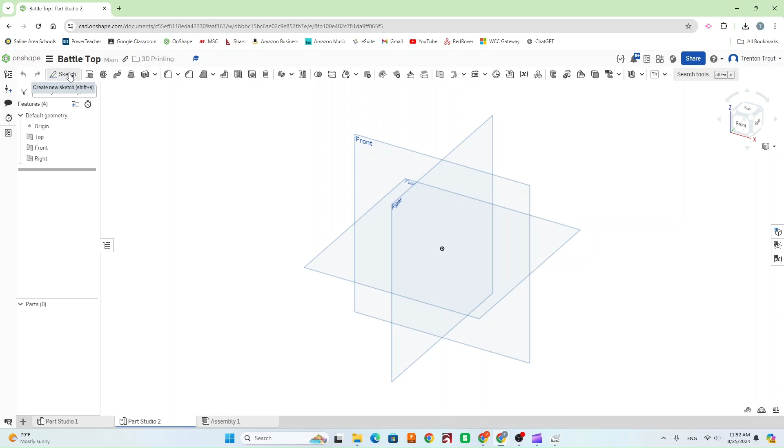The first thing we need to do when modeling this is create the attachment point so that we can spin the battle top up with the drill. That attachment point is going to be standard across all of your battle tops, and this is going to be that first step to modeling it.

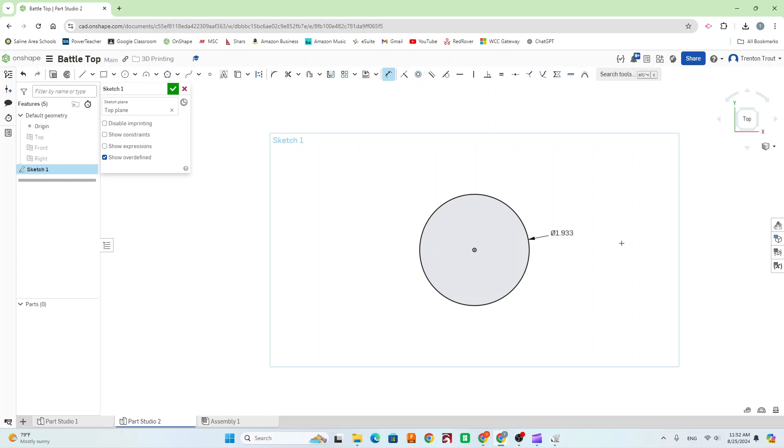First thing I'm going to do is create a circle. I'm going to dimension that circle to 0.75 inches, just like found on the blueprint, and finish that sketch. Now we're going to extrude that circle at a dimension of 0.5, also found on the blueprint, and hit the green check mark. So now we have a cylinder here that's extruded.

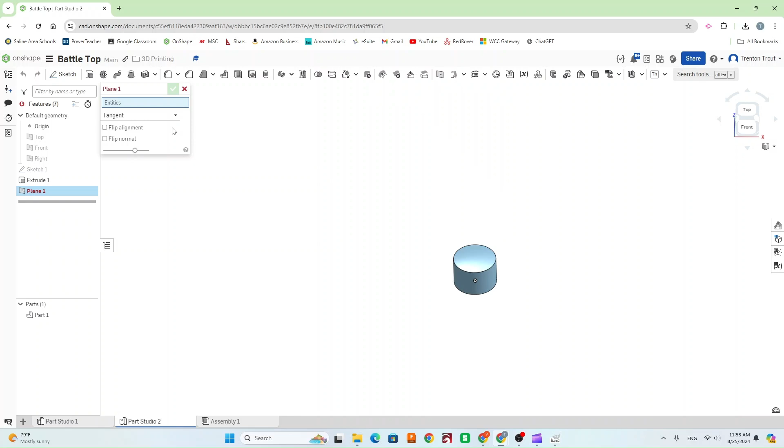So we're going to do something you probably haven't done before. We're going to do plane. We're going to make sure that we are on tangent plane, and then we're going to select on our cylinder. This is going to allow us to draw a shape on the side of the cylinder so that we can create those spurs for our attachment point. We're going to do a new sketch on that plane once we have it created.

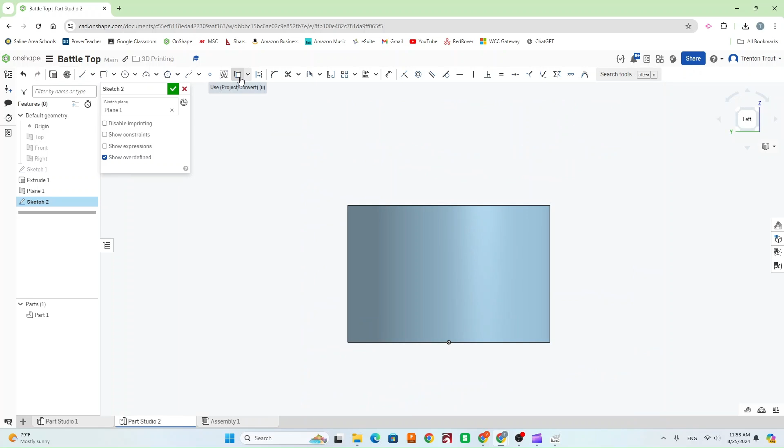I'm going to use the use/project tool and project our cylinder there. Then draw a line just diagonal across here. Now we can use our dimension tool, dimension from this top line to this point, and that's going to be 0.25 like found on the blueprint.

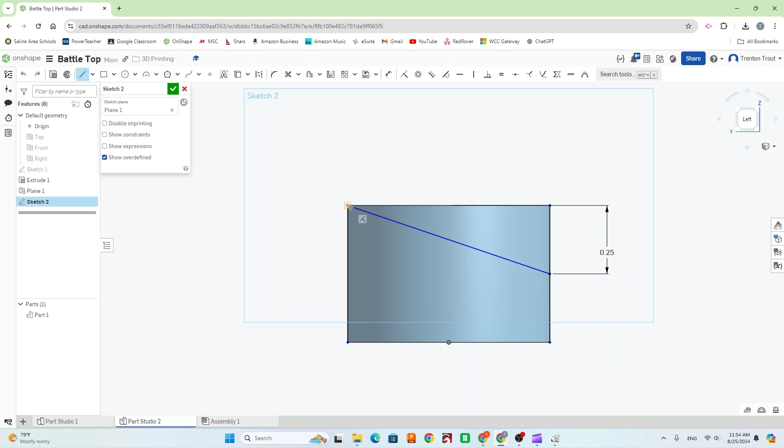So now that our angle's correct, so we know it's going to match up with our attachment, we're going to hit the green check mark. Before that, let's draw a line across this top to close in that shape. Now green check mark. Now we're going to use the extrude tool.

We're going to use remove, and we're going to remove that half of that diameter, so that's going to be 0.375. So now you can see we've got one side there. How do we go about getting the second side?

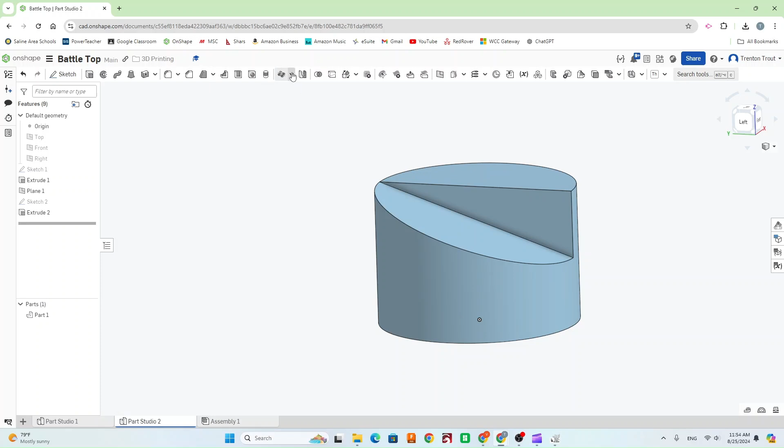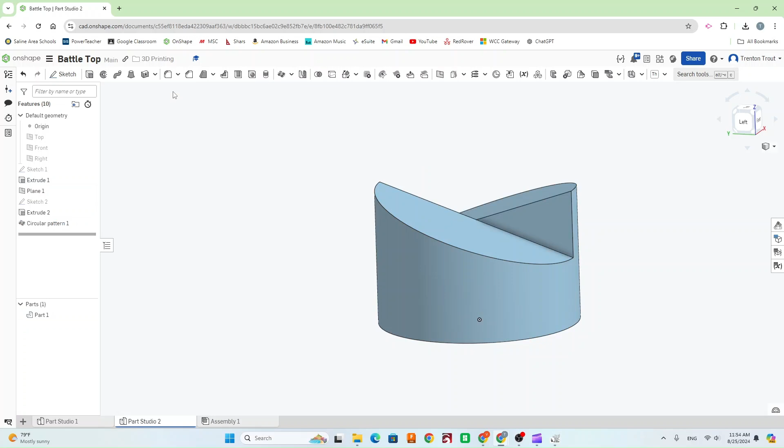We could do what we just did, draw it again on the other side, or if we go up here to this drop down and do circular pattern, make sure you're on feature pattern, select this for your feature, select the axis of pattern is going to be the cylinder, and then our instance count is going to be 2. The other box you're going to want to check is reapply features. So now if we hit the green check mark, we can see we just patterned that shape right to the other side. Super easy.

So now we have our attachment point. Like I said, that's standard among all of your guys' battle tops. We're going to hide that plane, and now we need to actually make the spinning top part. To do that, I want to create a new sketch on this plane right here.

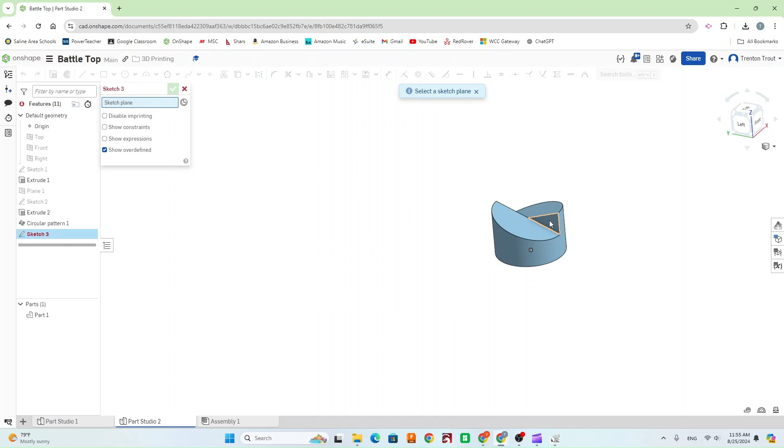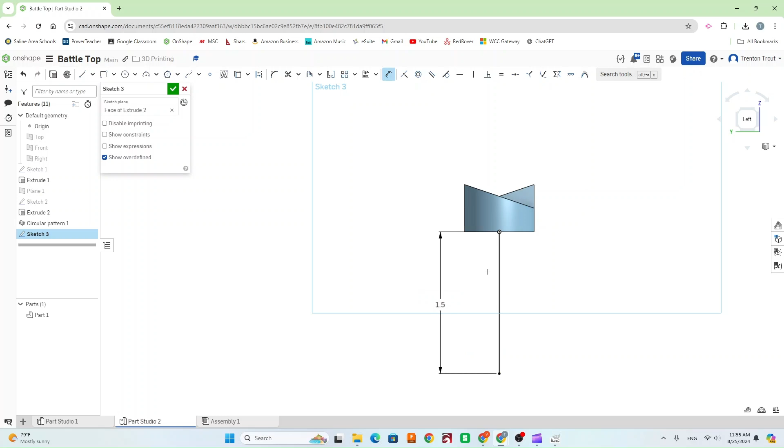I'm going to go ahead and start with just drawing a line down the middle here. Now your max dimension for your battle top is going to be 2 inches tall. So I can make this line 1.5 because I've already got the half inch from the attachment. Now I can add another 1.5 onto the bottom.

From here, get creative with it. We can make our point, and if you want to add a little flat on the point, depending on if you think that might spin better. Then we can just kind of draw out our battle top here.

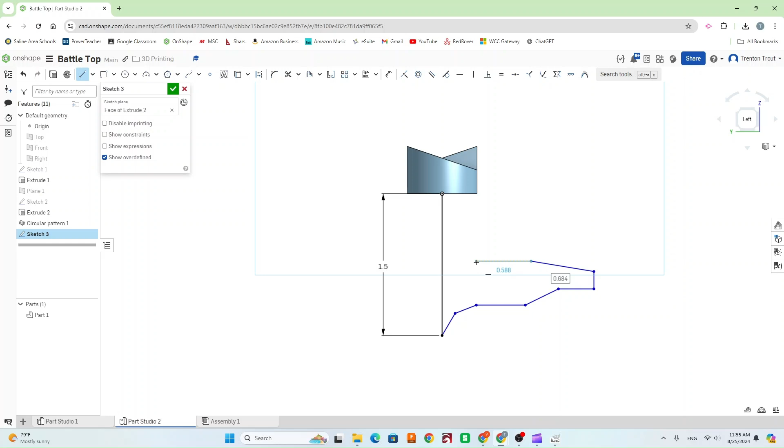Keep in mind this is going to be about half of the battle top. Envision that you slice the top in half and you're looking at a slice of it, and then we're going to revolve this to create that shape. When dimensioning to get our max dimension of 3 inches, from this center point to this edge needs to be 1.5 max, since that's half of 3.

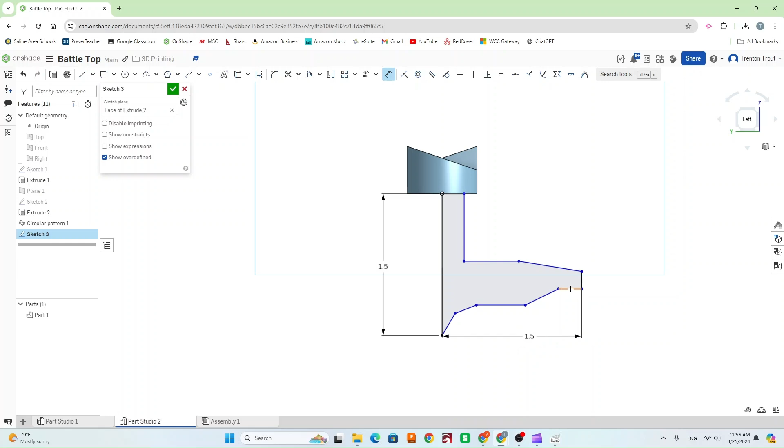So we have our point there. We can go ahead and move stuff around. Make sure you close that shape so that it's a solid. You can mess around with this, get all the different angles you'd like, however you want it to look, and get creative with it. Once you're ready, hit the green check mark.

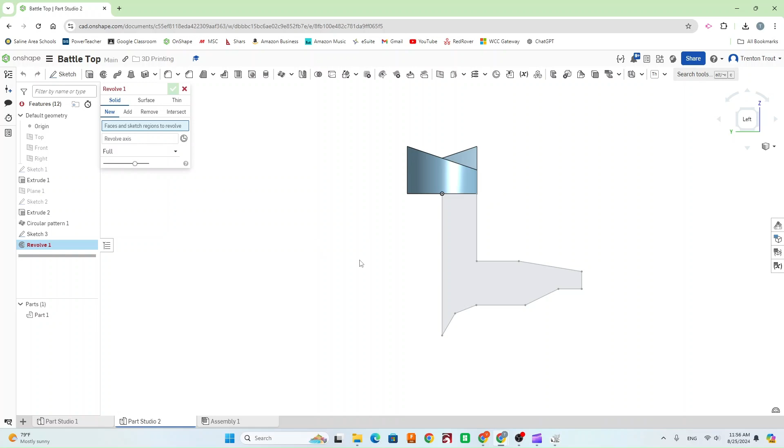We're going to use a revolve tool, select your shape, go to revolve axis, and select this line. Now you can see what that's doing is revolving our shape around so that we have a complete spinning top here. So now we can see we have our battle top.

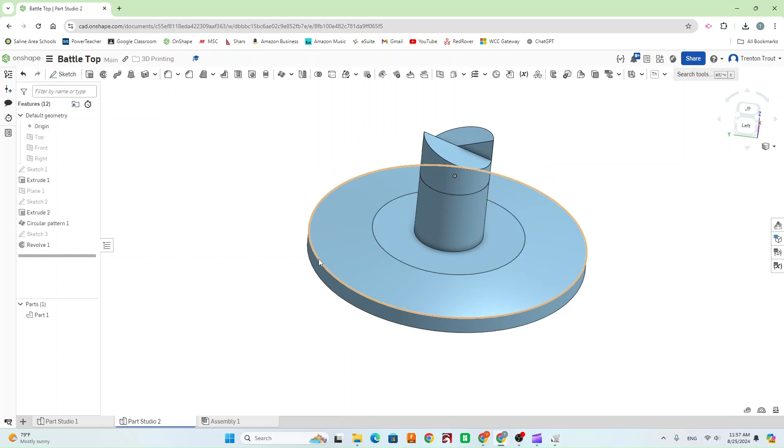Now I wouldn't stop there. We want this thing to go into battle, so you could go ahead and add some spikes on the top. I'm going to select this here and use the text tool again, and I'll put my initials there.

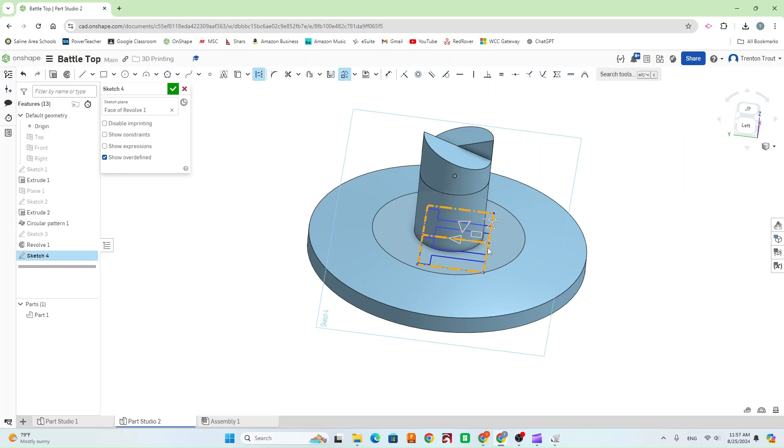Get kind of crazy with it. Again, we can use the transform tool to move this around. Add any decoration you want to it. You could add a logo as well if you'd like. I just want you to have fun with it, be creative, and also design this thing to go into battle. So I've got my initials in there.

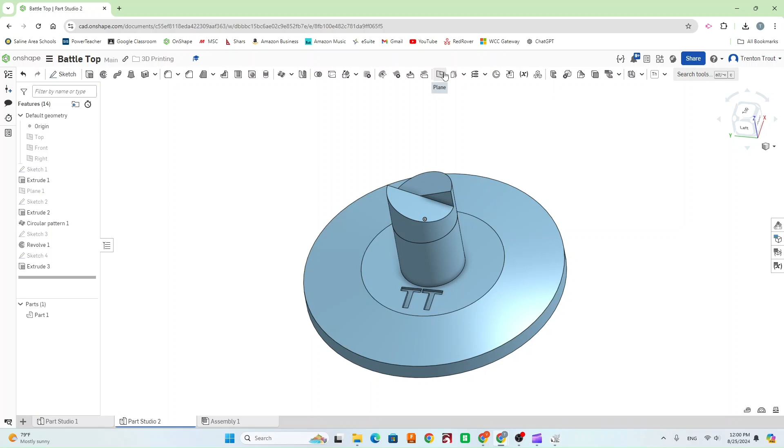Let's say I want to add some spikes along the top here. I'm going to do another tangent plane, tangent to this surface, and then I'm going to do an offset plane from that - another plane, offset, kind of in the middle of that section there.

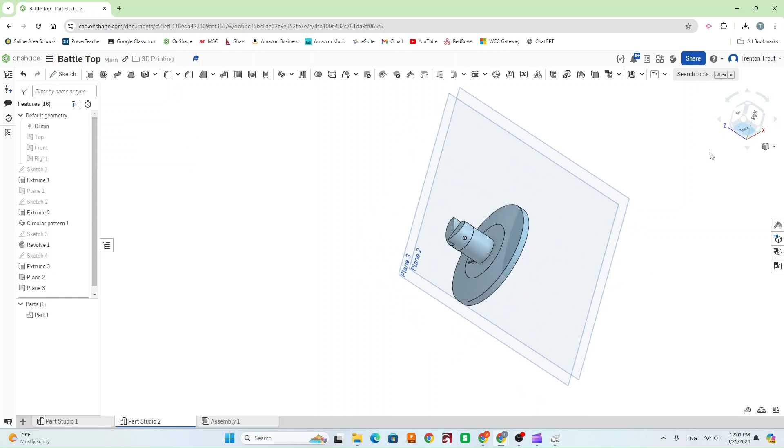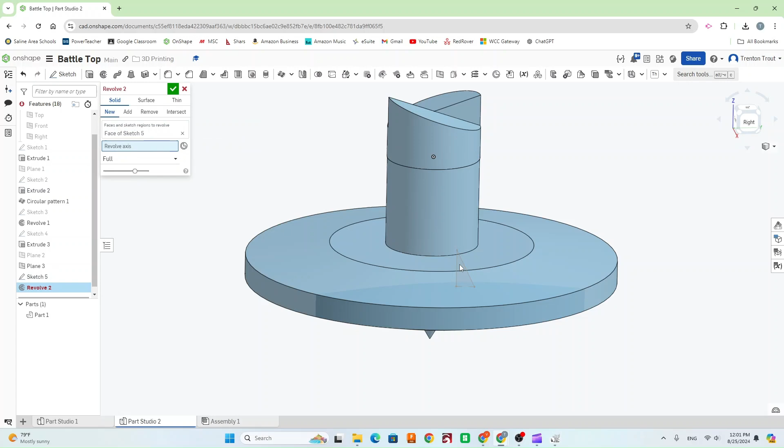Go ahead and make this plane invisible, do a new sketch on here, and I'm just going to draw my shape for my spike, something like that. Go ahead and use that revolve tool again, revolving it around this axis here. And you can see we've got one spike.

But what if we want more than one spike on there? Well, we can use that circular pattern tool again, doing a feature pattern as well. Select our spike and then select the axis for the spike. Now you can see we've got 4 spikes on there.

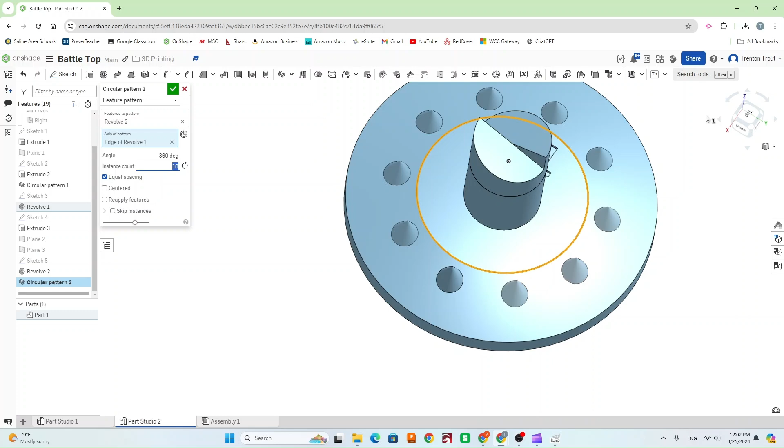If we want to change it, maybe we try 10, see what it looks like - something like that, and go crazy with it. We could add some more spikes in between those ones, do whatever we want, and make this thing look fierce.

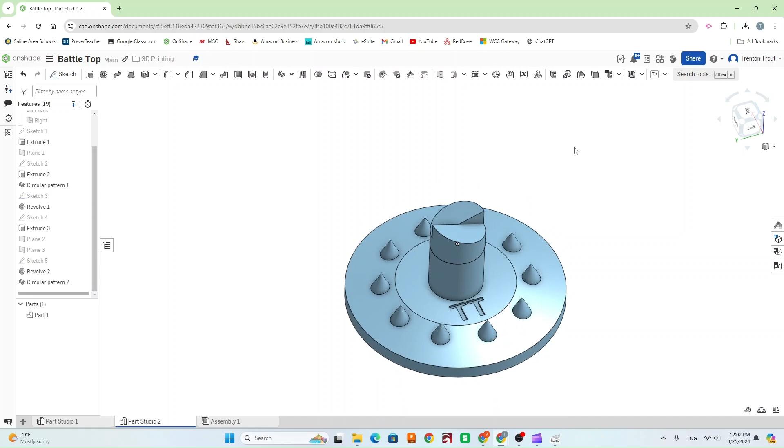So once you're happy with it and you've added all the features you want, make sure you have the attachment on the top - that's the most important part, it needs to stay standard otherwise it won't work. Then go ahead and bring it into Bambu Studio, just like we've done for the keychain, and 3D print it.

For this one, you're going to want to make sure you use support. Depending on the shape of your top, you're either going to want to support it from the bottom here or support it like this - that'll just kind of depend. Play around with it in Bambu Studio to get the shape you'd like on it.